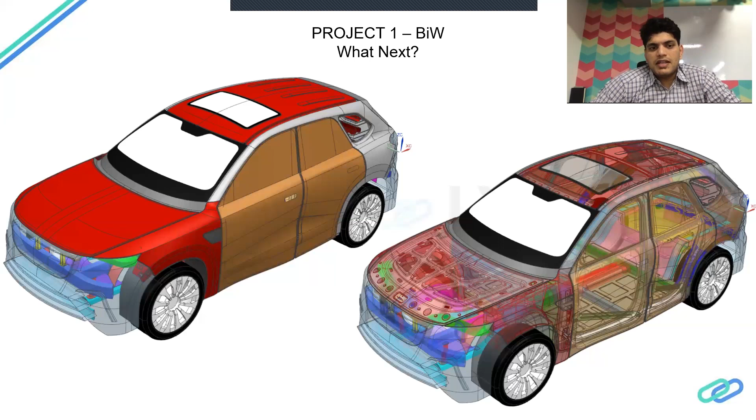Great. So this is going to be the opportunity for the interns now. Great, Subbu. Subbu, just to kind of understand, in my screen I see a car, an SUV, and this particular car - who designed this?

Okay, so this is the car which we designed ourselves. We had 4 interns working for the past 4 months, from July till this day, and we developed our own styling and all the components you can see here. We had scratch, we had zero with us, and we sat together.

We developed the styling for the car, and then we developed all the interior panels. You could see there is a roof, hood inner panels, floors, side door inner panels, and body side inner panels. I can maybe show in the next window what all commodities we had designed in the past 3 to 4 months.

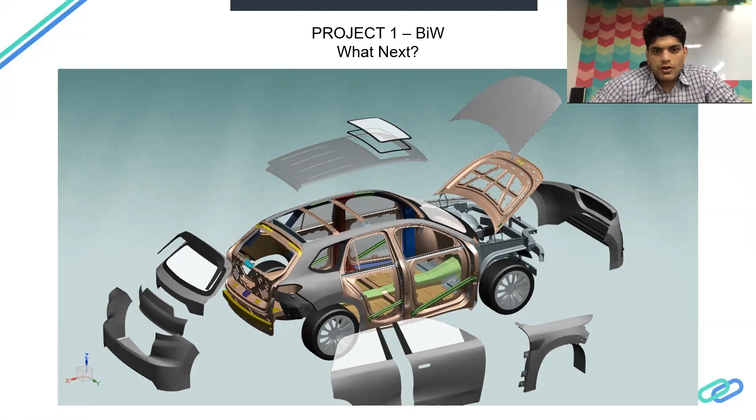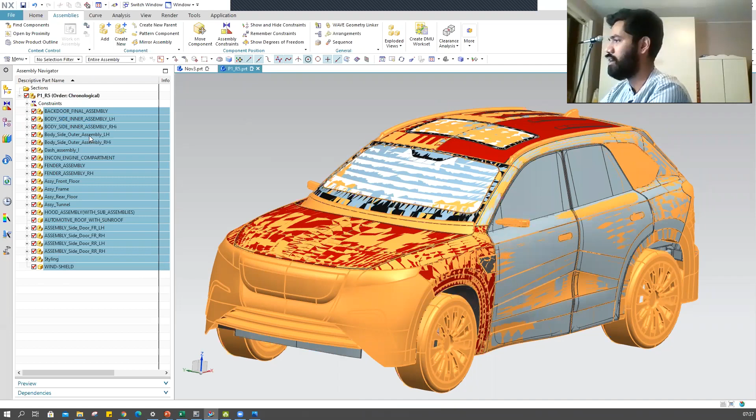If you can show the 3D model, that would be also helpful. Yeah, of course. So this is where we started, and this is the styling what we have in our car, and this is the first thing what we designed, and later we designed all the rest of the components. For example, the back door, body side inner panels, left side and right side, body side outer panels, dash complete.

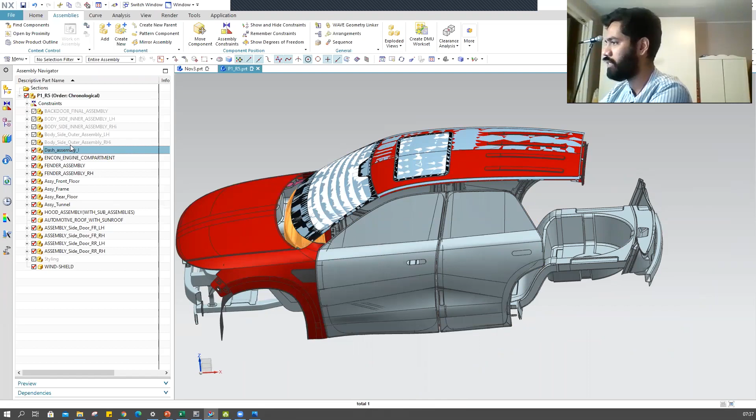And this is the side doors. You have your back door, body side complete, and we also have the floor structures, the engine compartment structure. I can maybe hide this. This is great. Yeah, so you have your floor structure here.

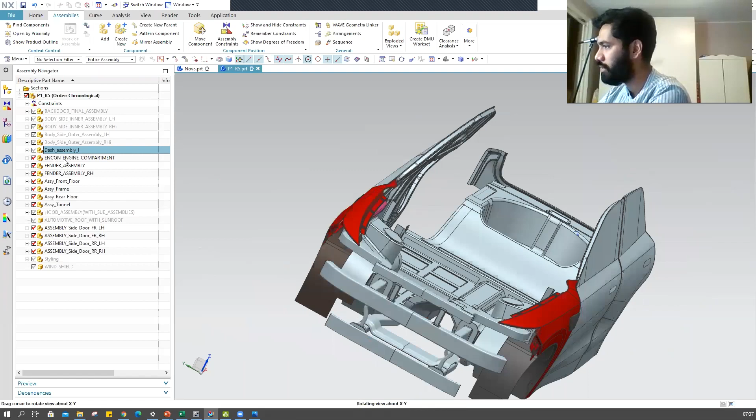You also have your engine compartment. This is the complete engine compartment. And these are all the floor structures, front and rear floor. And you have your side doors, front LH, RH, rear LH, RH.

And this is again not a single part. So the side door has other inside commodities, inner panels, and it has a door beam. It also has a belt line reinforcement. So it is as detailed as possible, like we see in an OEM industry.

So if you have a possibility to tear down an SUV right today, you will see all these parts, minimum of these parts you will definitely see. There are chances they have omitted some parts because of the cost of the vehicle, or that they have also added some more parts to the BIW, what you see here, because of the exclusivity of the project. But when you design a BIW of the car, these are all the minimum most required components.

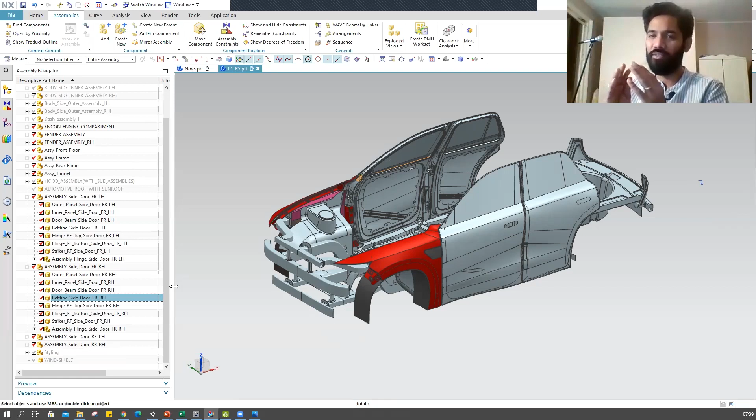What you need to complete your BIW package. When I say complete your BIW package, this BIW is what will be the sturdiest BIW, and this also talks about the rigidity of the complete vehicle, right? So I can also show you the bodies.

I had a quick question, Subbu. Yeah. So usually, say for example, I'll take you as an example, right? When did you learn all of these things?

That is a good question. I started in the year 2008, I believe, and I was a GET by then. And when I started work, the time when I started getting involved myself into a project, it was already 2010.

And when I initially started working, I wasn't given any complex commodities. I was just given parts to modify, or to add holes or add fillets and radiuses. So by the time I started working on real-time projects, it was already 4 years for me to take up any project like this and to start working on it.

And so I think it was 2012 when I started working on full-time projects and full-time activities, because this is how an OEM thinks, sir. When you get into an industry, they wanted you to already start giving output.

I didn't have any previous exposure, so they wanted me to first get trained myself so that I can get involved in a project. There were parallelly people with 1 or 2 years of experience who already got involved in the project directly because they had the exposure to the tool, they had the exposure to the components. Now, and that is why we created this kind of internship programs where we already give them an exposure.

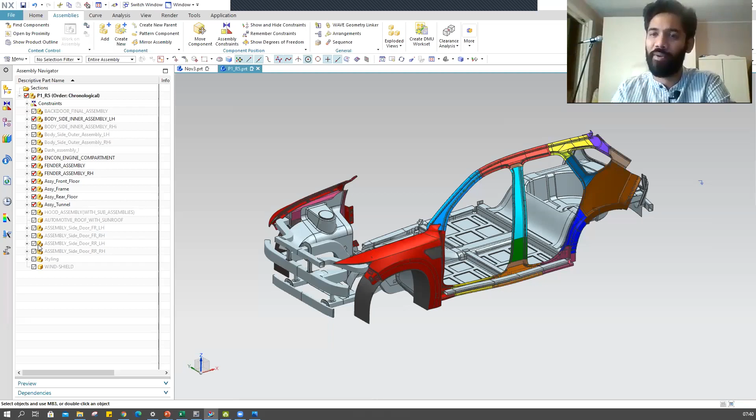Once they join the company, they can already start working for the project, or at least portray and express their skills to the company, so the company takes them quickly and adopts them to the project so soon.

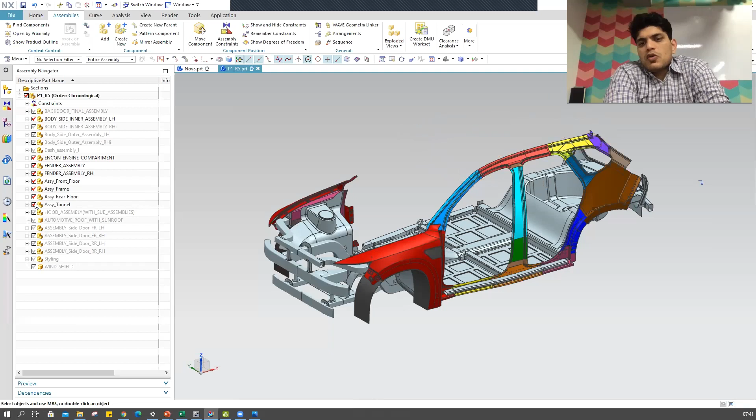Let me ask you a question, Subbu, just to make sure our audience understands. The view I'm seeing right now is the side door body panel. Yes, it's the body side. Some people might understand the terms for these items, like pillars - they call it A pillar, B pillar, C pillar. Why is that important?

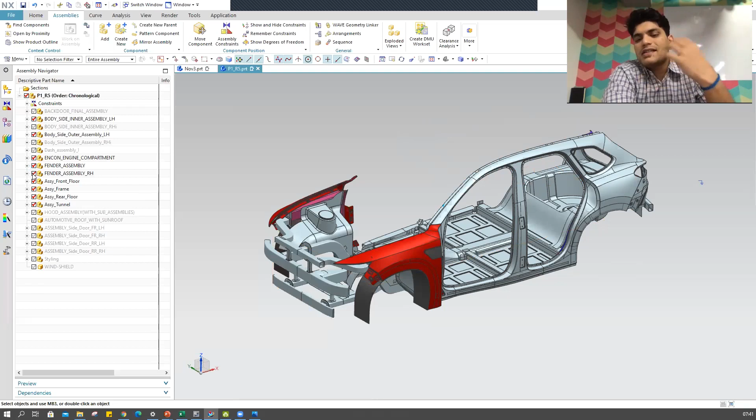What is the engineering behind it? When you design this, what do engineers think about? And why is understanding all these things important as an engineer when you go for an interview, or when you go into companies like Renault Nissan or MBRDI?

When we first start working on the project, we get only the styling. From the styling, each commodity will have its own purpose for us to design. For example, this is the only part we'll be seeing from outside the vehicle, but this doesn't solve all the purpose.

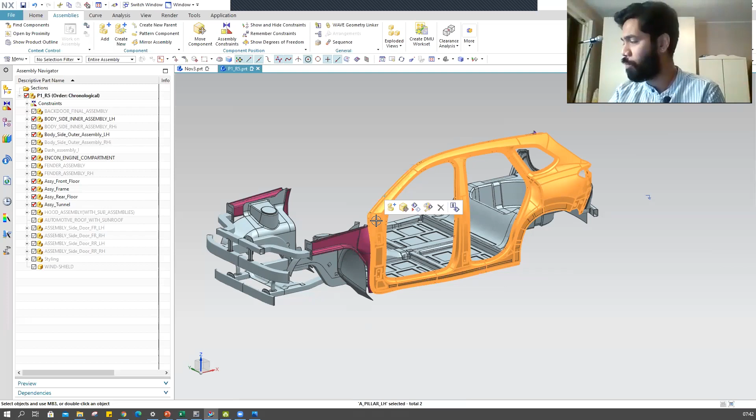A car is designed to keep people safer inside - the car can get destroyed, but not the people inside. So all the components we design are supposed to destroy or dissipate energy outside the vehicle. That's why we have so many parts outside, segregated into different stages - A pillar lower, A pillar upper, roof rail, center pillar, C pillar, and D pillar. All these are on a tubular structure.

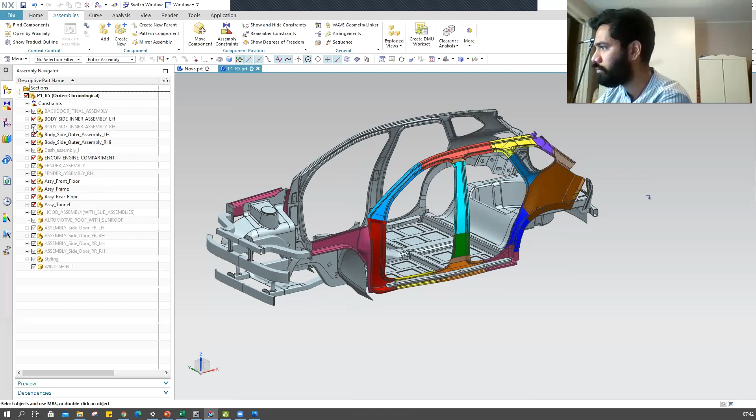I can maybe take a section and show you. I'd like to take a section here and show you what I mean by this tubular structure.

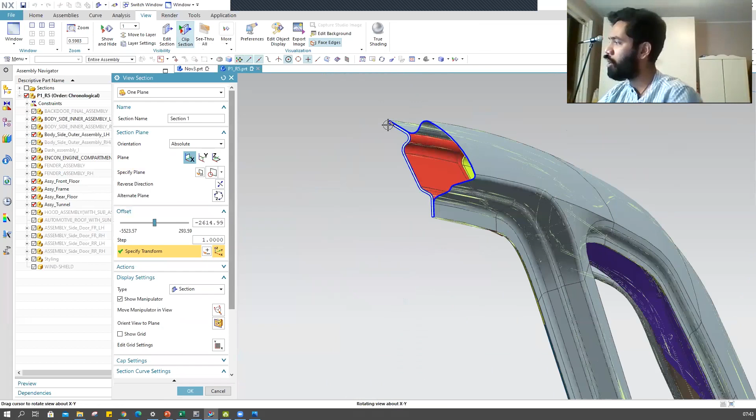So this is a module - a very, very important structure of a body section. For me to understand this structure, it actually took 5 to 6 years in my career, and body side being a very critical component, it took a lot of time for me to understand what they exactly mean. And why is this structure important?

This is the place where the body side will first crumple, and the energy absorbed during a collision transmits along this tubular area. The main intention of preparing a BIW is to dissipate energy outside the car and not inside the passenger cabin, because the main purpose of a car is to safeguard the people inside and not the car itself. The car can destroy however it wants, but not the people inside.

The very least possibility for people to get hurt inside the car during collision is what should be our design engineer's aim. These kinds of sections are very critical. If I sit for an interview and a person comes and draws this section to me, I will directly recruit him for the team.

Because to understand this section takes a lot of energy, a lot of effort, some hours of work. You'll have to understand the basic needs and basic things to arrive at this kind of section.

The material and thicknesses of each commodity also play a role. As design engineers, we decide what thickness will work here, what material we can use. I call this rank 5 data because it's not complete yet. When all the plastic parts, harness design, seating alignments come together, you'll need mounting holes and mounting embosses, and you can remodify your structures so they also get mounted there. So it's still rank 5, and you can improve this data to rank 1.

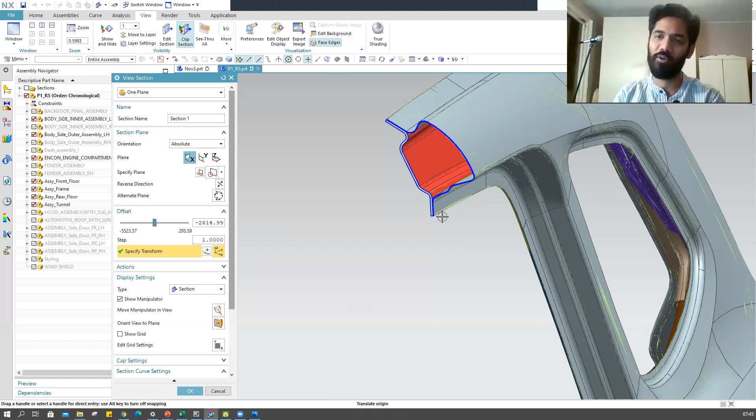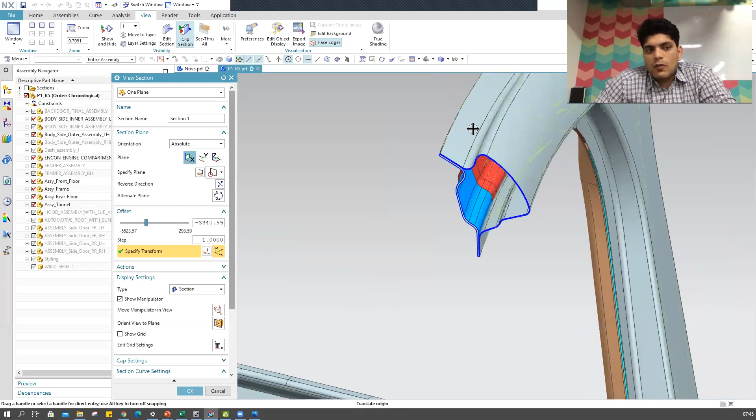Subbu, this is extremely helpful, because a lot of engineers - say, for example, me, when I did my engineering - I did not have any clue about any of these things. I just wanted to get into OEMs, into a very good company, but I didn't understand all these things. One thing I'm very happy about running Skill-Lync is the amount of information passed on to students and people early in their career who want to get into these domains.

While there is so much we can speak about with respect to time, I'm going to ask you for the next steps.

Say this is rank 5 data. So the interns who are coming in, what will they do? Can you go to the PPT and explain a little bit about it?

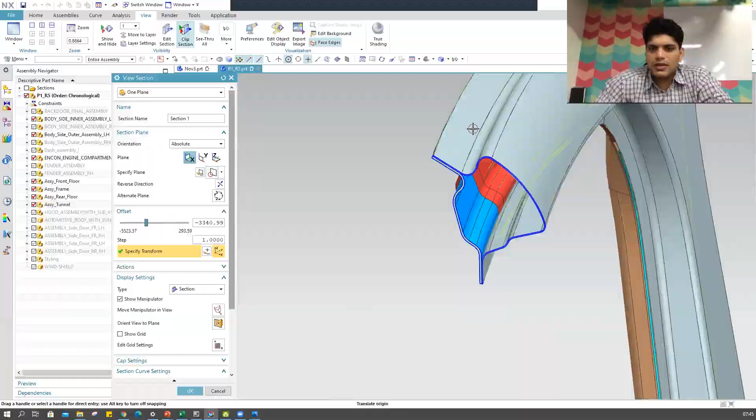So this is the rank 5 data, what we already have. When I say rank 5, I mean this is not complete data. Most of the parts are production ready, but not all, which means we will have to add commodities to it.

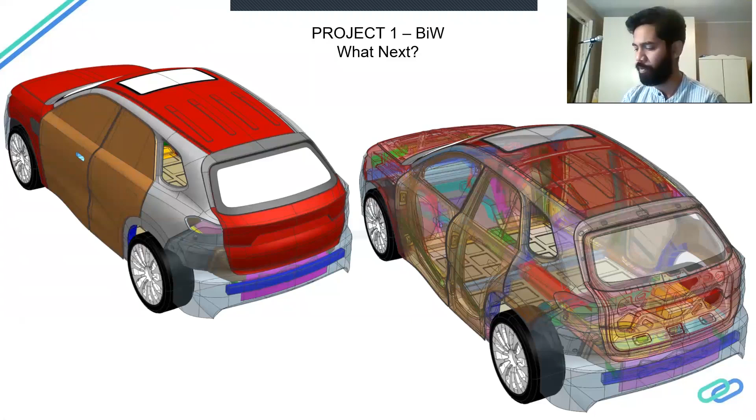So what are all the possible commodities which could be added to this? It's the interior and exterior plastics. The doors have their own door trims where you keep your bottle holder, power window switches, and speakers.

So door trim is one interior plastic. For 4 doors, it's 4 door trims, and the back door will again have another back door trim. Apart from that, interior plastic also includes a headliner, which is a thermosetting plastic part. And exterior plastics are the front bumper and rear bumpers.

We have this engine compartment data, we have the bumper reinforcements already available, so you will have to just mount your data. So this is what the interior and exterior plastic people will do.

We have scope for designing seats, lights, and other add-ons. What do I mean by add-ons? There are going to be room lamps inside the car. So those are again some add-ons.

And we also have the scope of developing the complete harness of the car. The power, the wiring system which gives power to all of the vehicle, that is the harness. So that is still possible.

Instrument panel and console, which is going to be a very interesting area again. The complete interior is going to be complete only after an instrument panel and console.

So we have a possibility to develop, taking this BIW as an input, many items. And if needed, we can also have students working on the styling, and modify the styling a little bit to get the exact input we actually need.

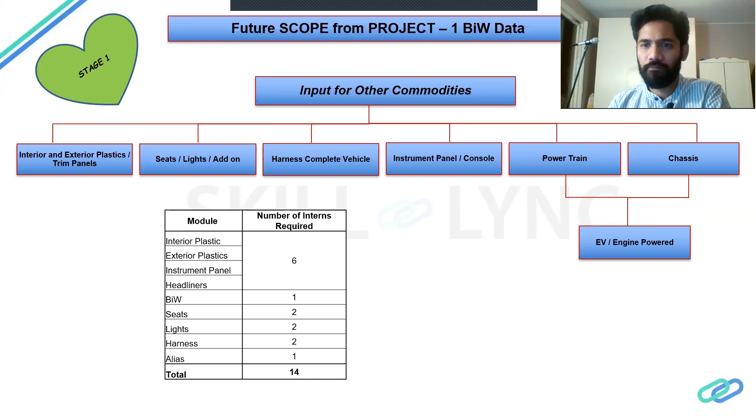So for people who are joining us new in the next coming week, we have a few additional things, which is the powertrain, chassis, and in the powertrain we are looking at EV and engine powered powertrain. So designing all those components is the next stage of it. And if you come in, you also have brilliant opportunities to start working on these kinds of aspects.

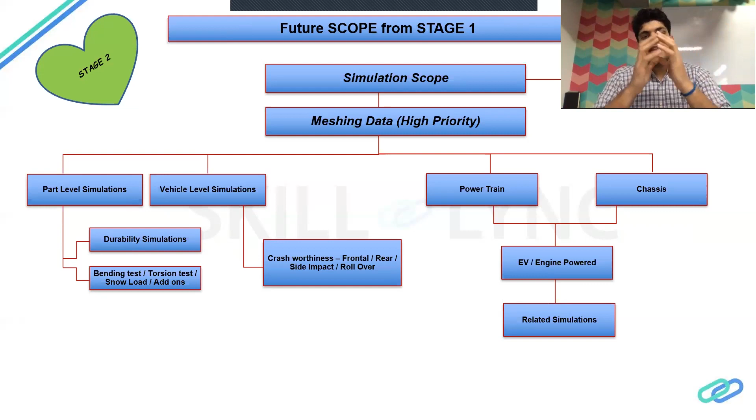If you're looking into computational fluid dynamics, then you will look into aerodynamics, wind tunnel testing, understanding drag coefficients, and so on. If you're looking into electric vehicles, then there is the EV powertrain. For this there will be batteries, so you look into battery management system, control system, electric drives, electric motors, and so on. So this particular project from A to Z is full-fledged.

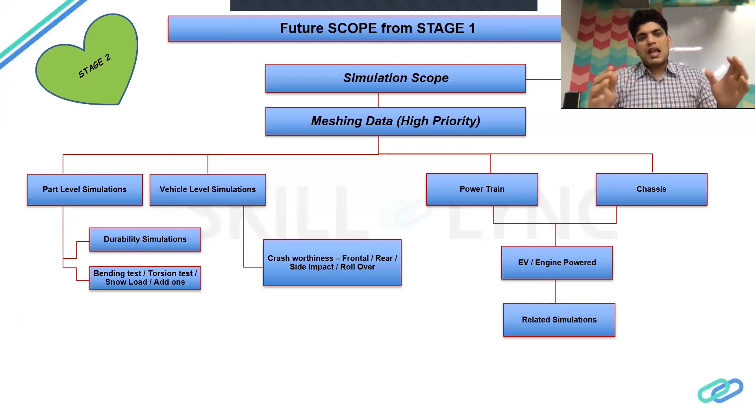So the reason we are asking you to enroll by this week is to make sure you will have enough time to understand these concepts in the first 3 months of the coursework. 3 to 4 months, if you put in a lot of effort, you will basically understand the fundamentals.

So that when you get onto the internship, you work on these projects and understand the concepts that you have learned in the coursework, and start implementing that as well. That's really important, because if you do not understand, you cannot work on these projects. Subbu cannot extract work out of you if you do not know how to design, right?

So Subbu works with interns who have already finished our design master coursework, who have gone through wiring harness, who have gone through BIW design, who have gone through Alias. So it becomes very easy for Subbu to give requirements as a project manager and get outputs from you as well.

That's really important. It is very important that we at least know the basics from the master's course what we've developed, and then implement what we have learned.

What I see as important, and why it keeps me connected toward Skill-Lync, is that we always think about students' future. We always think about the student who wants to get into a job and start working on real-time projects. At Skill-Lync, when we give them a project, it is all industry relevant project.

For us to proceed in this project, from the BIW to other add-ons, we will follow very strict timelines, which means you will have to deliver something on a particular day. If you are committed to work 40 hours a week, you will have to definitely work 40 hours a week. If you have to present your progress weekly or bi-weekly, you will have to do it without any stoppage.

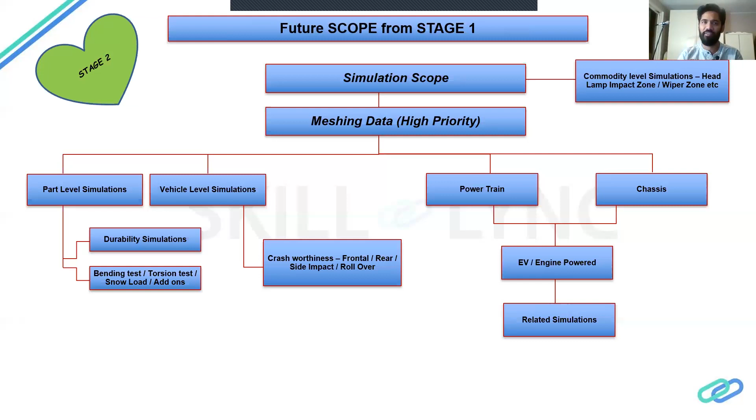If you get yourself knowledge through all this kind of information, you will be easily plucked by the industry. If you have some knowledge, it takes little time. If you don't have any knowledge, you become that ignored apple on the tree. So we at Skill-Lync don't want any of our students to be that ignored apple. We want our students to be the easily pluckable apple, and that is why we try preparing these kinds of projects with strict deadlines.

Developing one complete car with all these commodities in an OEM industry would take up to 2.5 to 3 years. The design phase itself will be a minimum of 2 years for us to develop all these commodities.

That is why we split all these things into 2 or 3 different stages. In the first stage we complete the BIW. In the second stage, BIW with other levels will be completed. In the third stage, parallelly we'll have powertrain and chassis developed, and also the meshing and simulation will start. So we planned it in such a way that by the end of at least a year, we'll have all the commodities completed with the complete information.

Everything you work on is one single model. It is not like a hood from one car, a roof from another, an engine from another, and a powertrain from yet another car. No, it's not that. You work on everything for one car, so you know the complete basics and the complete information. And when I say basics here, the basics itself is too heavy.

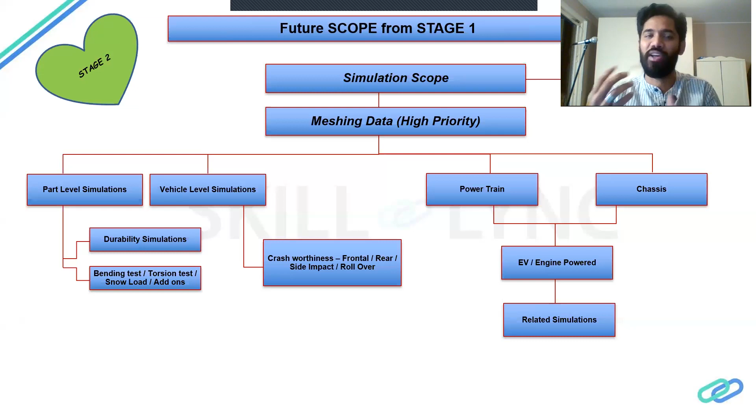Right? And just to make sure, all of these are paid internships. You basically get paid for doing this. These are not unpaid internships. And the most important thing is we are going to build the car that you design. What do I mean by that? It is going to be manufactured by Skill-Lync at the beginning of 2022. So when you apply for jobs, you can explain that you have worked on a real car.

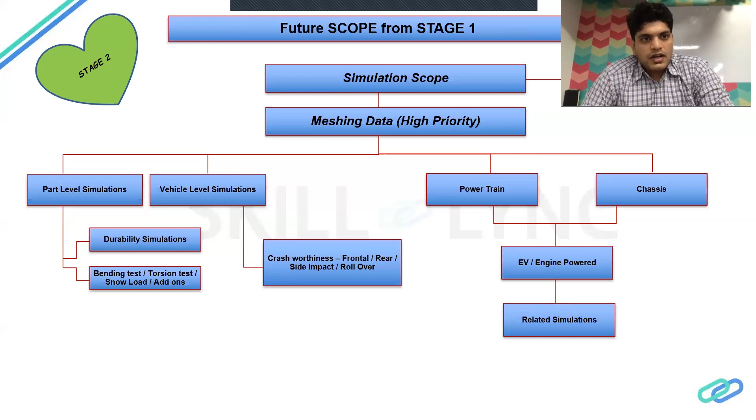That's really, really important, right? So, Subbu, can you go to the next slide and explain the other things? Yeah, so as Subbu goes to the next slide, one thing I'll explain is that besides these internships, another important aspect is the ability to work in an environment where timelines are met. That's what industries look for - not only technical knowledge, but also your ability to work to stricter deadlines. If you go and explain to them, 'this is the project I did, this is the amount of work I spent, and this is the output,' you are for sure going to get recruited at any company looking for these kinds of opportunities.

So yeah, go ahead Subbu. I'd like to add another point here. Since we are going to be a very small team of 14 or 15 people, that's comparatively smaller than a bigger OEM level team. The biggest advantage of being a small team is that even though you work on only one commodity, you come to know the aspects of all the commodities. You would have designed a back door, but you might also know what the rear bumper does, what the body side does, and what the rear floor does, which is a very big advantage. So if a rear floor guy faces a problem, you will be really eligible to go and support him in solving the concerns.

And this is what I wanted to add to it - when we are a small team of 15, 16 people, it is going to be a really big exposure for each and every one of us, and this exposure is towards the complete car. You won't even get this exposure when you get into an industry. The advantage of this is when you get the complete exposure, you will know where your interest lies, where you can shine much better.

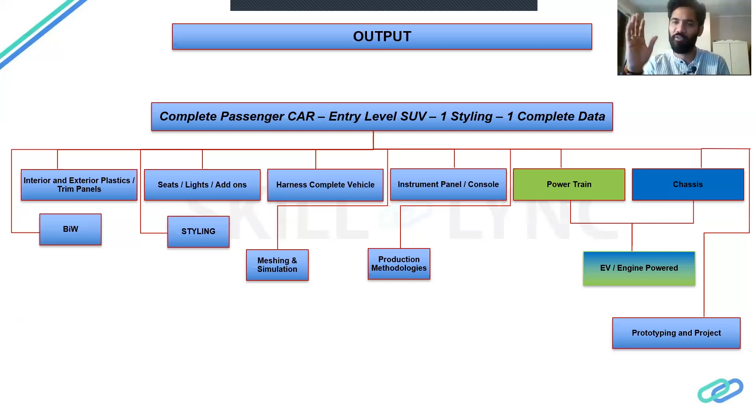That's really, really helpful for you guys, right? So that's why we recommend taking up these courses as well, not only because you end up learning a lot. A lot of what Subbu showed in the CAD model is basically taught in the coursework, and the internship basically allows you to build and be a part of a real life car.

What you see in this particular slide is the whole aspect of it. We start with BIW, go to interior and exterior plastics, again relook at styling, seats, lights, add-ons, harness the complete vehicle, then go on to simulations where you mesh and also do the simulations. You check the instrument panel and console, then you look into production methodologies.

A few courses in production are coming up in the next quarter of 2021, so we will look into that as well. Powertrain, chassis, and EV or engine powered - this is basically for our hybrid electric vehicle students to work on that aspect of it.

Then you end up working on a prototype and build the whole car itself. So this is the entire project. While this is a long video, what I'm going to do is finish it off here. I would definitely recommend you guys take a look at this video, understand the amount of work you will be doing.

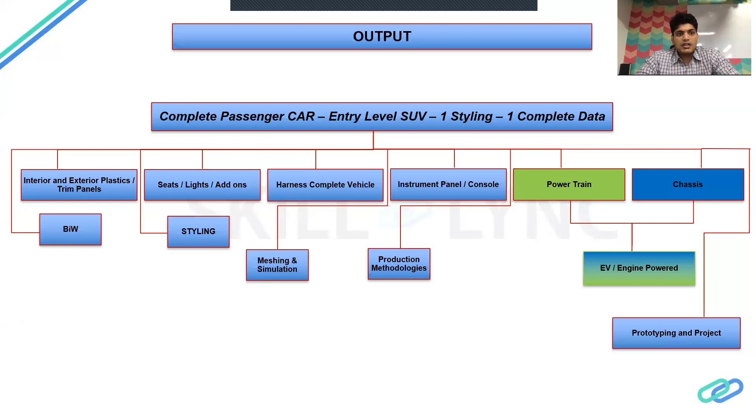I also want to reiterate, these kind of projects are not available pretty much anywhere in the world. There is no training platform which provides any of these things anywhere in the world. I can for sure say that.

So would it be fair if I basically said this experience will not be available anywhere in the world? Of course. I am still in the industry and I haven't gotten this kind of exposure since my university days till my present situation.

If I wanted to get this kind of exposure, I should have worked in a company for at least 3-4 years. There were times I used to say people stay in a company for 3 years so they at least know the basics of the company. And now if a person takes up this kind of opportunity, he will be equivalent to a person with 2 or 3 years of experience.

Having number of years of experience is not very important, sir. Doing the right thing during that time is what is very important. That is what makes you sellable in the market, making you that pickable apple, what I told you.